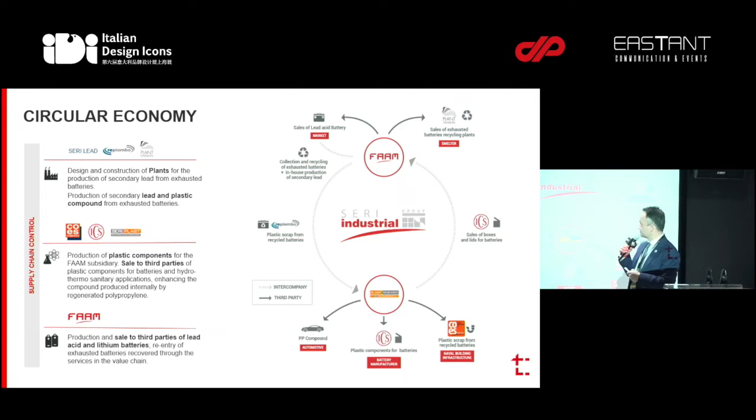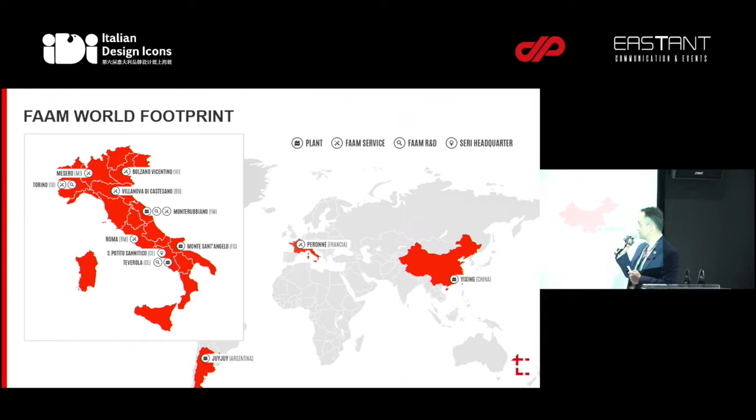Our locations are mainly in Italy, and in China we have our factory in Yixing in the Wuxi district. The products that we have, especially here in China, are like you can see here. So we have 4 lines of batteries using the new technology, lithium technology, lithium iron technology. We produce batteries for forklifts, for AGVs, automatic guided vehicles, for tractors, for example in the airport. And also we customize solutions for energy storage, where the electricity needs to be stored, for example, for some backup.

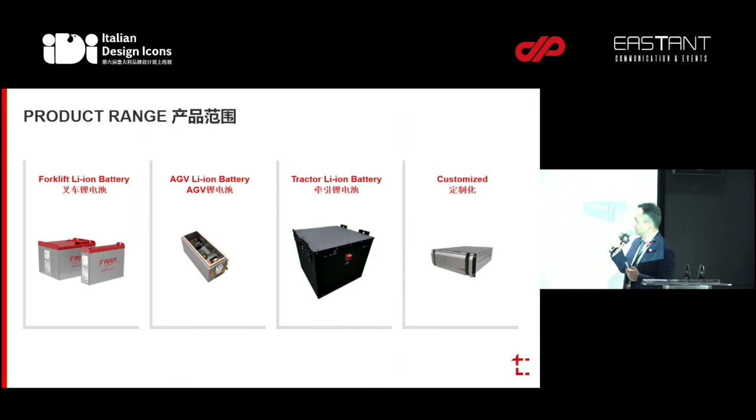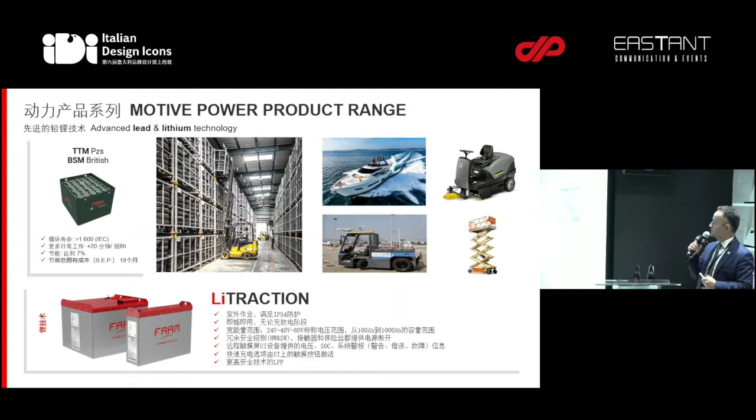Before discussing the topic of this event, so design and material, I want to give a little introduction of the product that we have brought here, and we are showing on the second floor. So it's a lithium battery module. We call it Kombi module. This basically is produced in Italy, and in China here we design the pack, and we combine the module depending on the application. It's a very new, let's say, technology where the module is composed of many small modules.

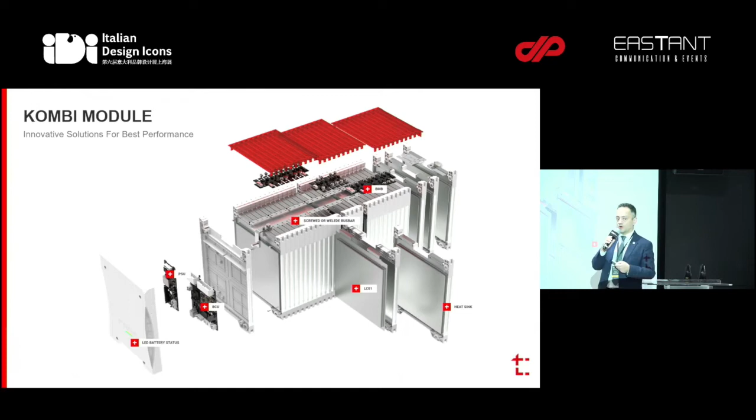Each module has a standard, so we did this in order to standardize also the production, to minimize and control as much as possible the cost. And then we can combine the small modules into a big one, and then put the big ones also in series in order to make a bigger and bigger pack, depending on the application that we need. This can be used in several applications, like also cars, basically. Some of our competitors are actually already using this kind of system for automotive, but we are focused more on industrial applications.

Okay, now let's go to the main topic of the event. So how the design and material influence the performance of a battery. I'm not here today to give a lesson, but I take this picture that I think is quite clear and understandable. Every kind of product, cars or forklifts, this is our main product, but also other kinds of applications where there is a battery, start with the electricity coming from the grid.

So if you think that you get 100 of electricity, I don't know how many know that actually in the lead acid, so traditional technology, only 92% goes to the charger. Then the charger, due to many inefficiencies, for example, of the net, of the cabling, or the product itself, only 70% goes to the battery, and then only 64%, this is an average number, but quite reliable, to the final application. So in this case, for the forklift. So how do the design and the material influence this?

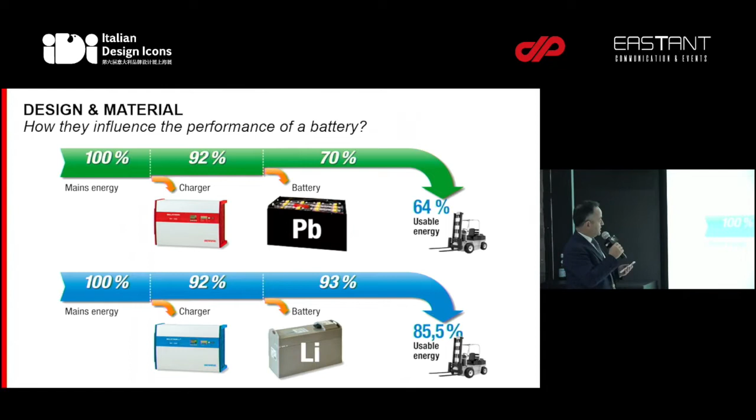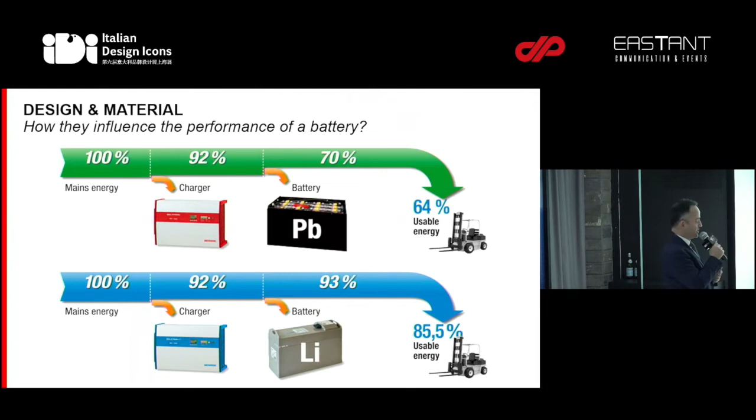Material is very important. For example, there are so many kinds of lead, so many kinds of refined lead, of different purity. So the more pure the lead material is, the higher the efficiency of the battery, because, for example, the internal resistance of the battery is lower. So we buy, for example, 99.99% pure lead in order to increase the efficiency.

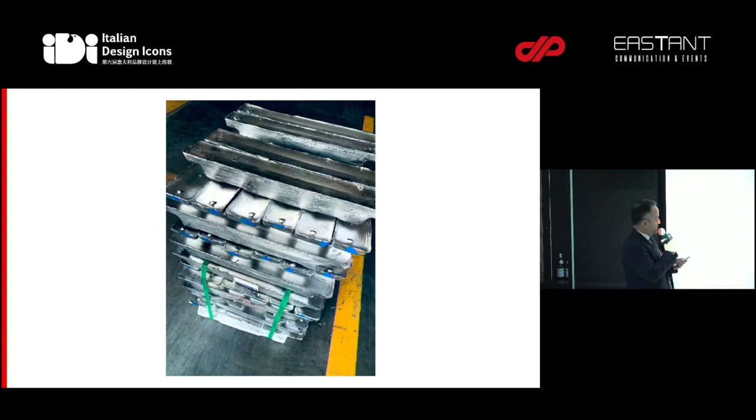Of course, if you buy a higher quality material, your product has a higher cost. So when you buy cheap things, it means something. Sooner or later you will find it. Designing the product is also very important, how we design the modules. The design of the cable, of the connector, everything is very important to make the internal resistance and efficiency of the battery as good as possible.

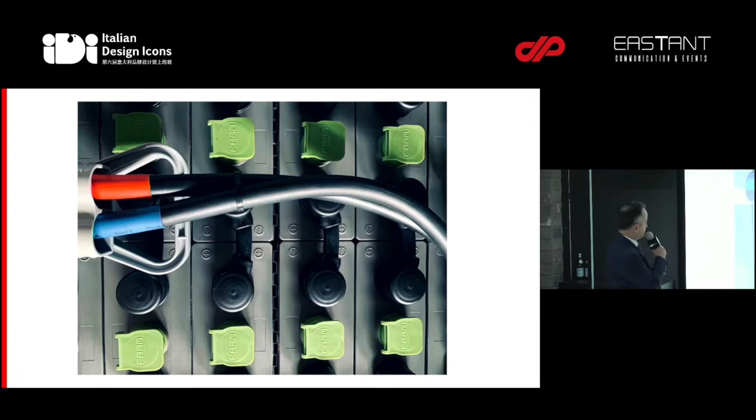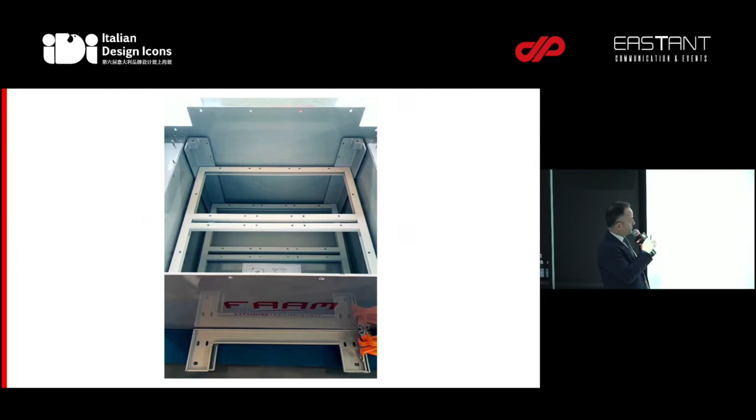This is one of the latest products that we designed. We started this year, and now with the lithium technology the technology level increased a lot. So we have a team that is able to design everything from the box to the cabling by ourselves. And you can imagine that in a lithium battery, where there are maybe thousands of cables, it's very important how the design of the system and the battery management is done. So the attention to the details of the cabling is also very important.

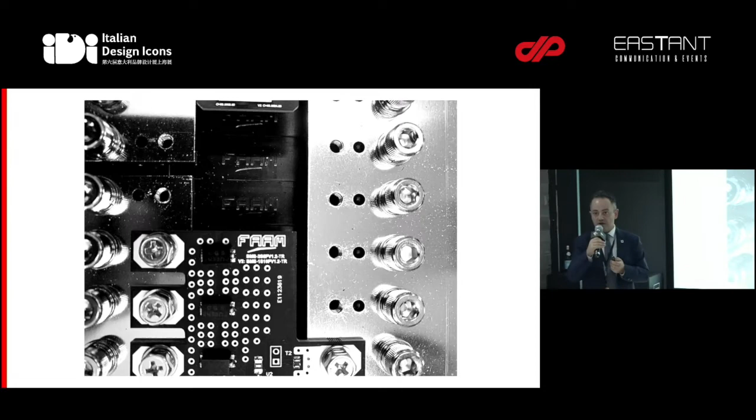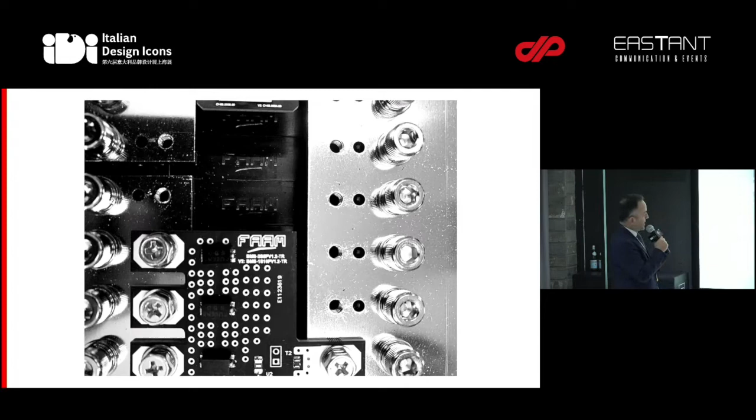The last picture is regarding the board. The battery management is another very important point of the design and the efficiency. The board and the battery management are designed by ourselves in Italy, and they increase the energy efficiency of the battery. That's our motto, that's our philosophy: energy saving battery. So the design and the material for us means making the battery with the best energy saving.